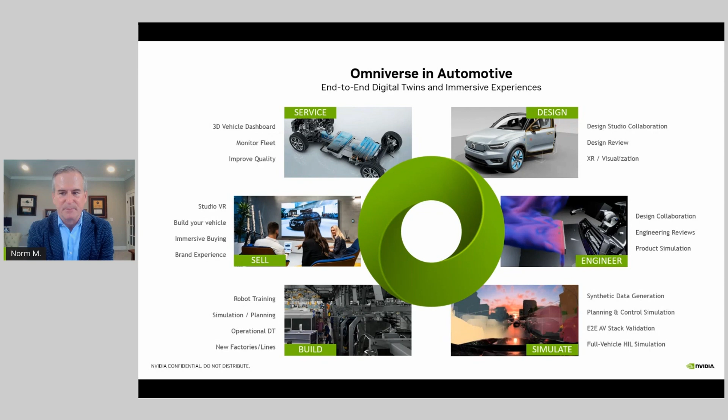Omniverse is at the center of all of this, enabling so much development of these digital twins and immersive experiences. Today, we have an opportunity to actually see several of these in action.

Before I get to the actual examples and a few videos that we have, let me say a little bit more about a digital twin and a few key components to bring them to life. One is leveraging inside of Omniverse what we call USD, Universal Scene Description, to pull in all the variety of different data sets that you have in your organization and create one extensible single source of truth that we can use for these digital twins.

Everyone can still author in their tools of choice, but we bring them all into one place in Omniverse that we can then use to create physically accurate replicas. It's important that it be physically accurate and have the proper physics, so humans move as humans would move, assembly lines flow as they would, vehicles drive as you would expect.

With AI cockpits and so many other examples like human ergonomics, it's about being AI enabled, but also enabling AI inside of Omniverse. One example: if I'm in a configurator, imagine I'm speaking out, make the exterior red, make the interior a certain package, and then a recommender engine running in real time suggesting something to me while I'm talking. This is an example of AI-enabled digital twins.

And then ultimately, everything is totally synchronized. As I said, you work in your tool of choice, and Omniverse renders just the latest and greatest view, while behind the scenes people are continuing to make changes to the design or the factory itself.

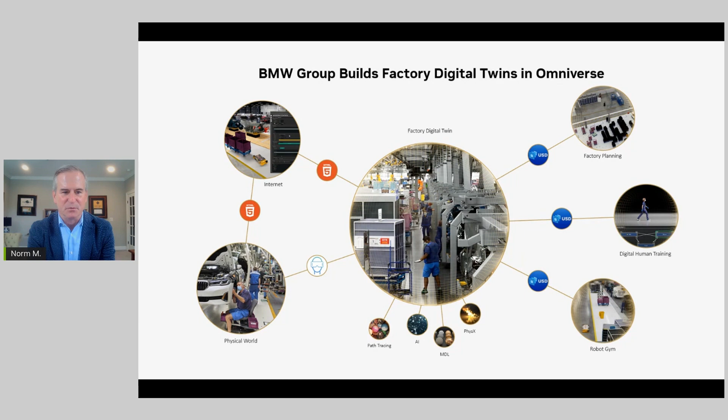We have a video that will actually bring this to life for you. So let's see the BMW factory in action.

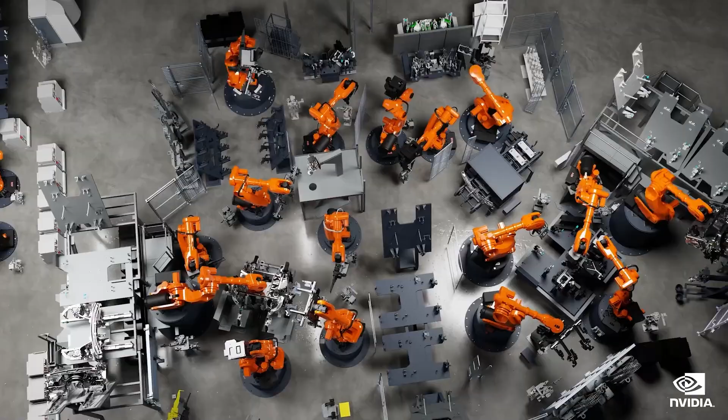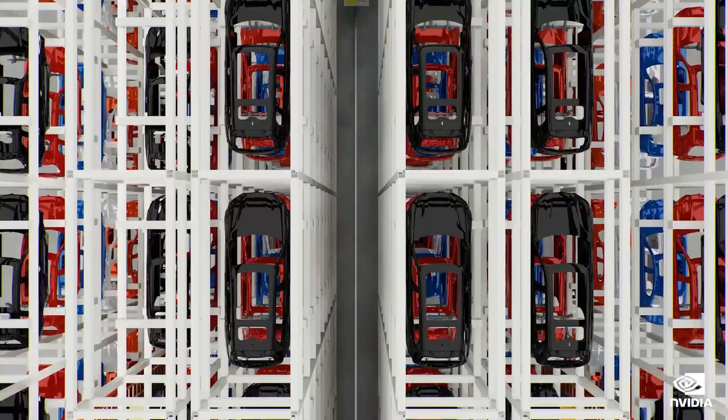BMW has continued building on the momentum of their Factory of the Future initiative we showed you earlier this year. On average, they produce one new vehicle every minute, expanding the initiative to now include digital twin projects at 3 additional factories, which total more than 6 million square meters. Meeting BMW's demands for continuous improvement and innovation requires simulation of complex production scenarios to speed output, increase agility, and optimize efficiency everywhere.

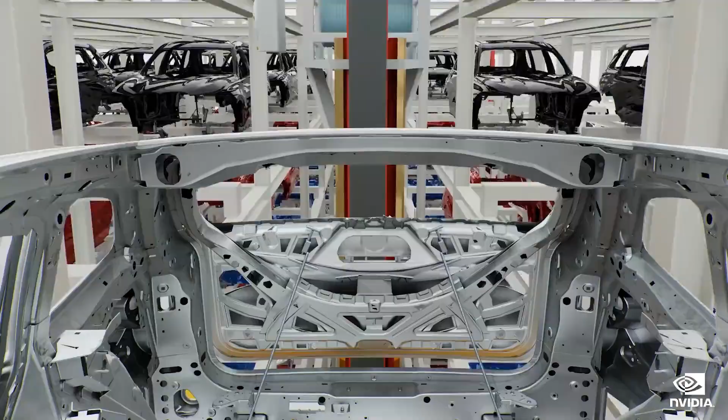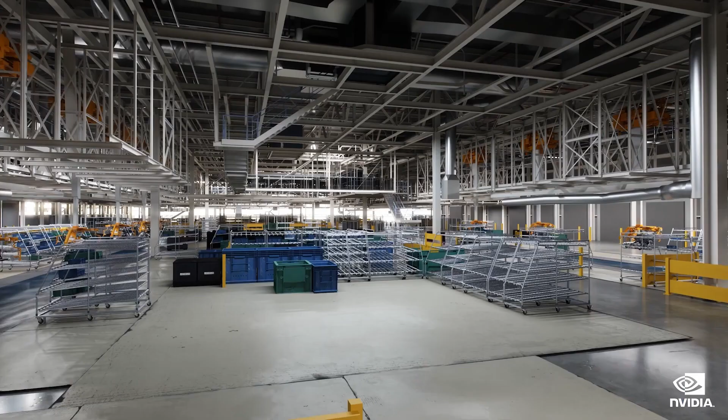NVIDIA Omniverse introduces new simulation capabilities everywhere BMW needs to make critical decisions and introduce automation. BMW and their partners have also been connecting new users and tools to expand the Omniverse ecosystem. Spanning every aspect of the BMW Factory of the Future, Omniverse allows BMW to collaborate and simulate from the entire plant level down to comprehensive engineering detail.

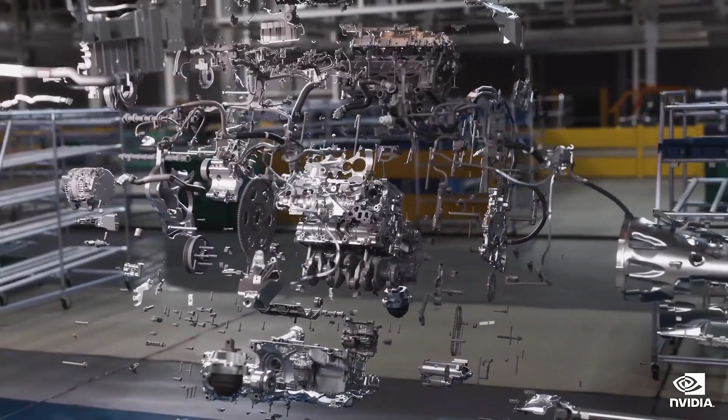Well, a digital twin of the factory certainly can have huge impact on the business. It can accelerate time to market. It can take out considerable cost of production, hundreds of millions, if not into the billions. But of course, we need to sell vehicles, and Omniverse and immersive experiences are making a huge leapfrog change in terms of how future vehicle sales will occur.

No longer do we need to rely on static 2D models and configurators. First of all, we can create sales and marketing content that is 3D, full videos, and imagine actually being able to have a commercial built in Omniverse where we're seeing the vehicle perform and drive in a scene that's all virtual. We love the idea of customer service AI-driven assistance.

And then I already hinted at this earlier, configurators and virtual showrooms. Today we have customers that have a showroom where we can put on a VR and AR experience. An assistant can prompt seeing how the vehicle would drive in the highway. How would a vehicle drive in an urban setting? But as I said, now with the advent of injecting even more AI into the immersive experience, we can just speak conversantly.

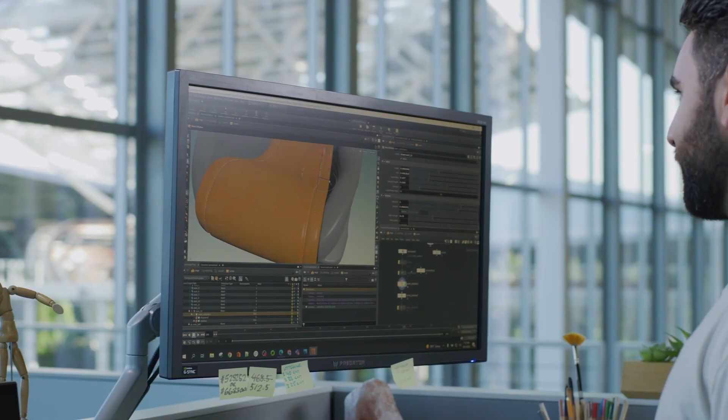The 3D models of cars such as Rimacs are designed by large teams of uniquely skilled individuals, each using their own specialized tools. Here, designers connect to Omniverse Nucleus Cloud, their shared database engine. With USD workflows, they can aggregate full CAD fidelity datasets from their favorite tools, including Autodesk Alias, Houdini, Adobe Substance 3D Painter, and Omniverse Create.

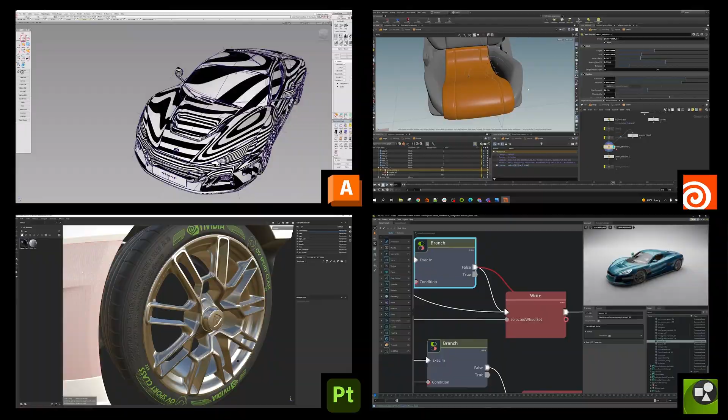Each designer either works on their individual RTX computers or streams Omniverse apps from OVX servers in the cloud. Once complete, Rimac integrates the ground truth USD model into an advanced real-time 3D configurator and publishes it to the NVIDIA Graphics Delivery Network, a planetary scale network of distributed data centers that stream high-performance, low-latency 3D experiences to edge devices. Today's configurators are limited by pre-rendered options that can only be shown in a single scene.

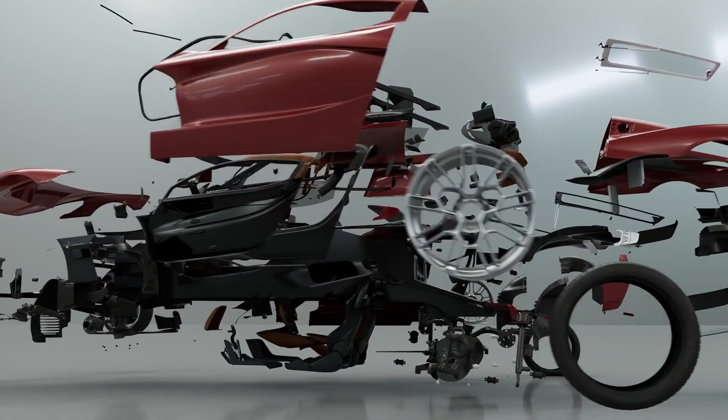With the end-to-end USD pipeline, Rimac fans and consumers are configuring the actual engineering dataset, not a simplified model, in full fidelity with physically accurate materials and real-time RTX ray tracing. This unlocks all possible design permutations without Rimac having to manually render every option as a layer. Omniverse Cloud connects 3D artists, designers, and metaverse viewers at every edge of the planet and delivers the possibility to build and operate advanced 3D internet applications on any device.

So the Rimac configurator is just so exciting. You saw from up front being able to see the design collaboration that was done to bring the vehicle to life, but then also having that configurator experience with the vehicle, having it be exactly what you want when you purchase it. And then ultimately, that configurator can lead to a virtual reality and an AR experience.

Now, what you didn't see in the Rimac video, what I want you to imagine now, looking at the left-hand side of the screen, imagine if we were actually seeing bounding boxes picking up objects, maybe a deer crossing the road, and we could actually see that happening in the experience. We're seeing the lane lines depicted, so we're seeing the AV working. This can give us so much confidence in the vehicle itself, even before we do a literal test drive.

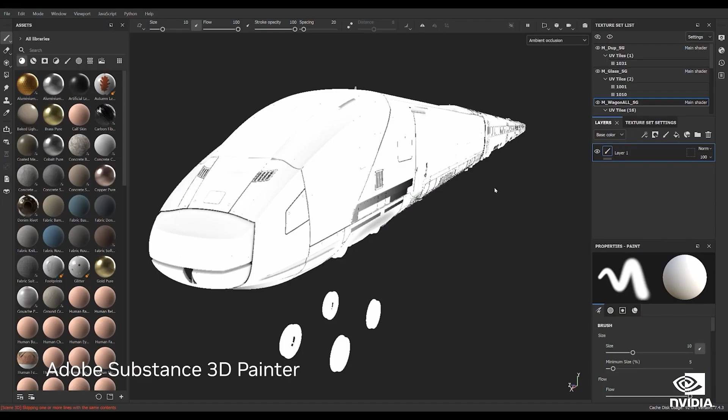Digitale Schiene Deutschland, or DSD, part of German railway network Deutsche Bahn, is designing and building a digital twin of its rail network to maximize transport efficiency and capacity without building new tracks. Realizing a digital twin of 5,700 stations and 33,000 kilometers of railways is a massive undertaking, requiring a custom 3D pipeline connecting DSD's HD map with CAD datasets and simulation tools, including those from Siemens' JT ecosystem.

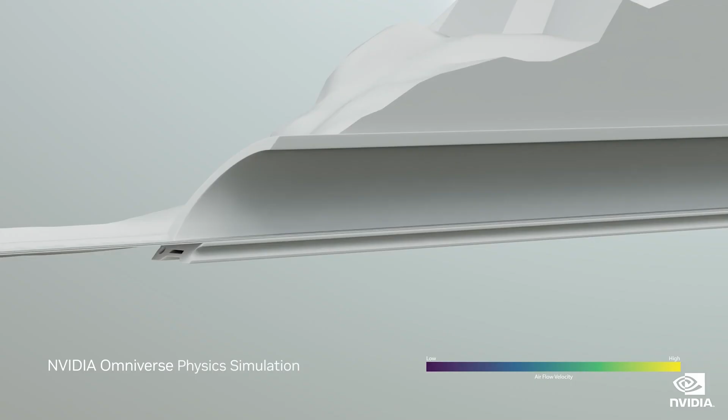In NVIDIA Omniverse, based on the Open 3D Framework Universal Scene Description, the teams are able to connect and aggregate critical data sources into a single high-fidelity model. With a single source of truth, DSD can use the digital twin to test and validate the entire network, enabling continuous improvement in the deployment of vehicles and railways, maximizing operational efficiency and speed while reducing costs.

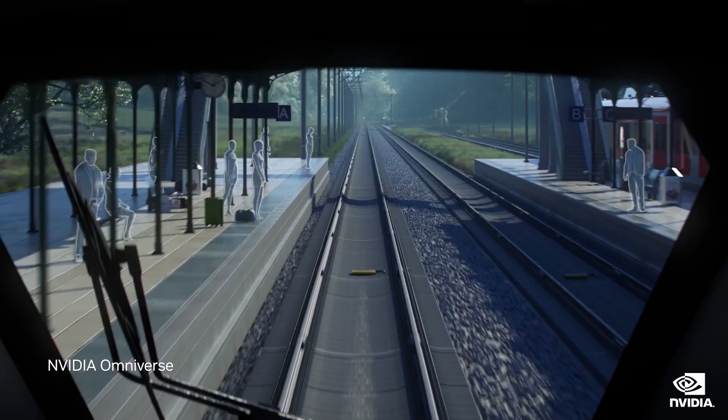Beyond simulation, the digital twin will provide the environment to train the complex AI that manages the fully automated railway system. Running on NVIDIA OVX, the digital twin can be synchronized to the real-world trains and rail networks via 5G-enabled sensors and 5G Edge microcells. If a train's cameras or LiDAR sensors detect a potential hazard, its precise location can be quickly relayed to the rest of the trains in the network, preventing a collision or congestion.

If the AI-powered computer vision-enabled cameras at a station notice an issue, an event can be triggered to instantly notify personnel. The intelligent sensors are trained and optimized on a combination of real-world and synthetic data generated by Omniverse Replicator, ensuring the models can perceive, plan, and act when faced with any scenario. With Omniverse AI-enabled digital twins, Deutsche Bahn is working to increase efficiency and capacity of the existing rail networks, reducing waste and carbon footprint, while keeping passengers and goods on time.

So now let's pivot in just a few words to round things up around autonomous vehicles. I won't take us through all the detail here, but it's very computationally intensive, from ground truth data collection to labeling and mapping and developing 20 or more DNNs for level 2+ driving, all the way up to customers developing upwards of even 50 DNNs as they work towards level 5 robotaxi. But simulation is what I want to spend just a few minutes talking about, so that we simulate and ensure safe self-driving vehicles before we deploy them on the road, with automated driving testing routines like NCAP, parking, and ultimately those AI cockpits I've already talked about.

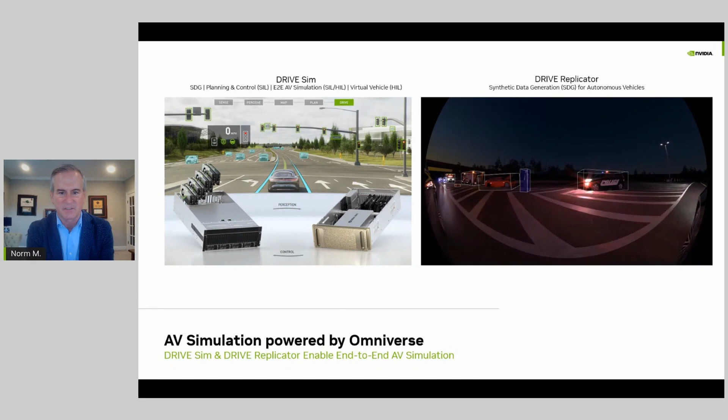So now let's take a look at Drive Replicator in action. Imagine trying to tell a data collection car: go out and find 5 or 6 ambulances and police vehicles on the road. It's not just camera data we're generating—we're generating LiDAR and radar at the same time. We also see segmentation, as depicted on the screen. Look at this really complex scene with the lights, at night. We can also generate data on occluded pedestrians.

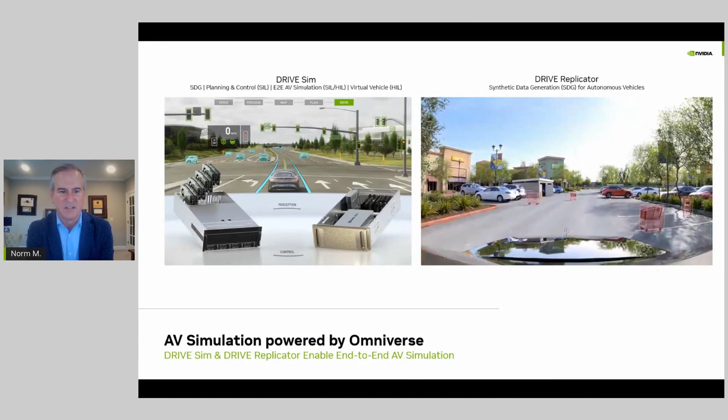Domain randomization speeds us up. Here we're seeing a variety of pedestrians, cones, and a variety of shopping carts. Imagine we just described one scene going into this plaza, but then we randomly produce a number of assets to make that run faster for us. And we can also do multi-sensor simulation.

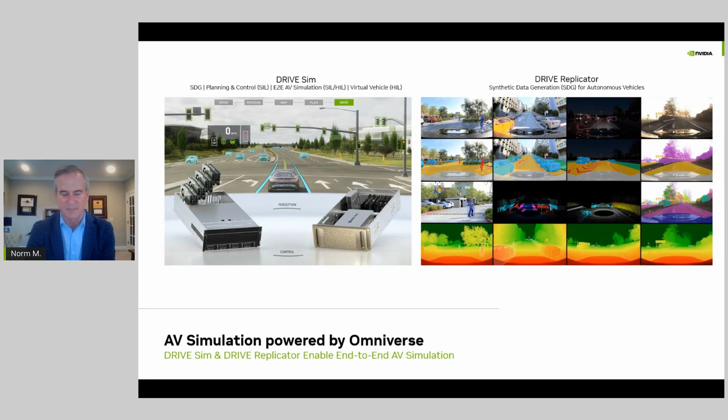So 4 places that we've already applied this: we've improved our path networks, our AI for path detection, by as much as 10%. We cut months out by emulating sensors before we had them. We've improved our ability to spot traffic lights by as much as 3%. And we were struggling with certain signs in Europe, so we injected these data assets synthetically and improved those networks by 2%. When we're talking about safe self-driving, these kinds of improvements are significant and material.

And so a few concluding thoughts. First of all, it's all about taking advantage of the opportunity to centralize your data assets and yet keep that synchronization I talked about earlier. You've heard me talk about a broad set of use cases. My challenge to all of you is to figure out where the most value is for your business today—what's your phase 1 through phase 5 set of projects that you can do to bring digital twins to life, knowing that you can apply physically accurate simulations and leverage synthetic data up front to get more work done.

Now, we're here at Microsoft Ignite, so the final point, of course, is you can start and develop potentially on workstations, but scale in the cloud. So we've built NVIDIA Omniverse Cloud, and of course we encourage you to consume it at Azure and get started now. There's no time to waste.